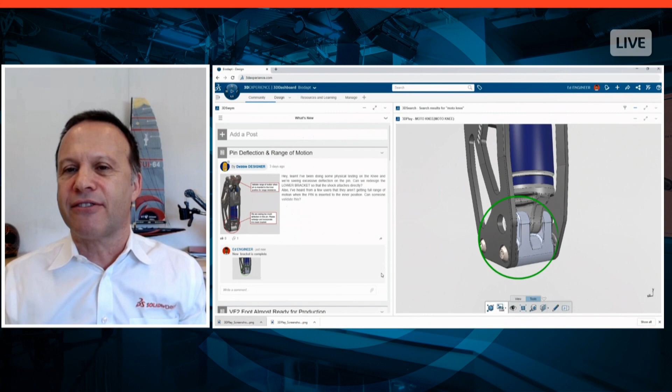In a way, this is something we all do already in various activities of our private lives when we use platforms like Amazon, Google, Facebook, Apple. We go online, we authenticate ourselves, we have a profile, we go places where you do many things, whether for convenience, shopping, or entertainment, and you do all those things in a consistent, integrated, and simple environment. You expect from this platform to find something new and interesting every day. We wanted to bring this type of experience to our users, going from simple isolated products to an entire platform type of mechanism. And we think there are very important advantages in doing so.

So let me just focus on four. We can talk a lot about that, but for instance, let's talk about embedded data management. I already mentioned this—it is included, it is embedded. Today, if you want to manage your data better, you have to use a separate product. You have to install it, you have to maintain it, you have to use specialized hardware, you need to have an administrator. Now, with our offers, all of this is gone.

With embedded data management and a central repository for all data, this helps manage complexity, organize information in a much better way, and ultimately helps you make better decisions. So this is an important advantage—the ability to make better decisions, both in business and in technology.

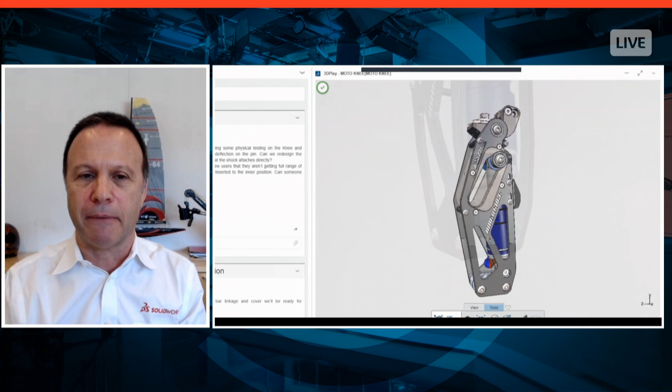Second, the collaboration tools that are part of the offers make it possible to establish and grow relationships among all the participants in a project or in various activities you do within the company or within the professional ecosystem. This will help exchange of ideas, leading to better coordination and, in the end, more innovation. So this is a huge value—it will help our customers be more innovative.

Number three: as you know, with the platform, SolidWorks assets are saved in a unique repository and everything is kept connected—you have what we call a unique source of truth. With the platform, we are able to store in any project all the relevant assets—specifications, documents, exchange of information, brainstorming, design variations. So you have a unique source of truth where everything is kept orderly.

This will make companies more agile, more flexible, and as we can see today, even more resilient to disruptions like what we see with the health crisis all over the world. Everything is in one place—you can connect and do your job from anywhere.

The last, but probably the most important part of our transformation from product to platform, is that on the platform we are able to create a lot of automation. One type of automation everybody will love is that everybody will be on the same version—we automatically update the versions of SolidWorks desktop, and we automatically update all the database, all the parts, drawings, and assemblies, automatically.

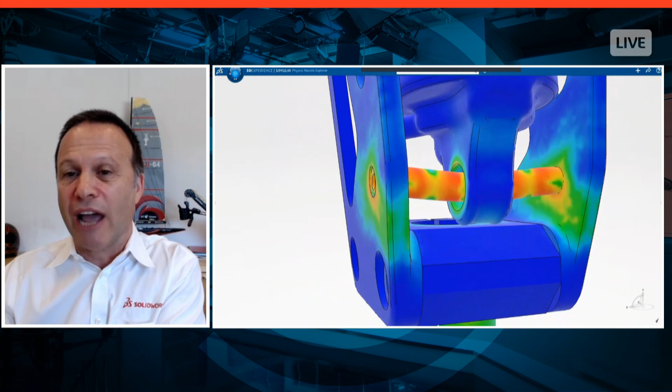Data management is one, but what about amazing simulation? Super scalable simulation, multi-physics simulation. You will find in the platform everything you need to get your job done, in bite-sized chunks, simple apps. It works just like your iPhone or your iPad. You find what you need, you get your job done, and the data model is fully consistent. You can interoperate among those amazing capabilities.

I think that's one of the really interesting things here. So today we have a new offering that comes with a set of apps. We're going to dive into that in a bit with a technical deep dive. But one of the things that's really cool here is we really open the floodgates. You were alluding to that with tools like powerful cloud-based simulation.

We're going to have access to a massive number of new apps for our customers. When we look at 3D Creator and 3D Sculptor being part of 3DEXPERIENCE SolidWorks, that's just the beginning, right? We've really opened the doors to all sorts of new capabilities for our customers.

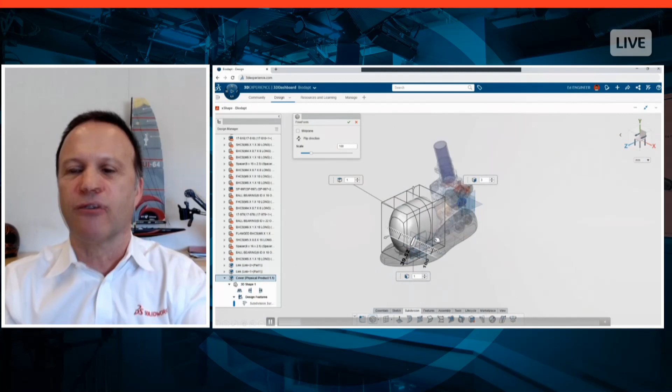Yeah, indeed. And this is part of why we are doing this, because our customers are asking for continuous delivery of innovation. Every new idea that pops up in the world, they say, 'what about me, how can I play with it?' For instance, design guidance, generative design. You're showing here the amazing capabilities of organic modeling, subdivisions. This is world-class technology, by the way, used by major OEM automotive manufacturers. From design all the way into manufacturing—CNC, MES, ERP—everything will be available on the platform progressively.

Material science, simulation of sintering processes, tools to predict better 3D printing capabilities. And the good thing is it comes in bite size, so you can explore. There are a lot of navigation tools, a lot of guidance there, a lot of examples, a lot of education, a lot of videos that explain what the various applications can do, and what adjacent applications are available, similar to what you're used to today.

You're exploring for a product and you find an indication: 'you know what, if you buy this product, maybe you're interested in this because it's a good complement.' If you're interested in this type of thing or these types of movies, here are other movies that can enhance your experience. All of this will become available on the platform. It's just like on your iPhone—you go on the App Store and explore, you put in a keyword, and you find amazing capabilities to enhance your productivity. This is exactly what we're going to do with the offers.

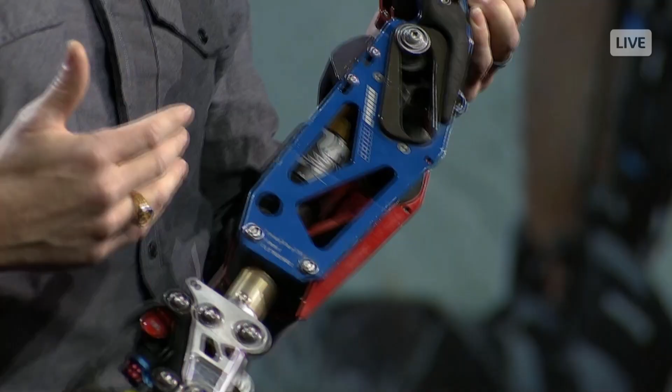There's some really good stuff for everyday equipment for walking around, like what I've got right now. The fundamental difference is, thank you, this one swings as I walk, and this one actually has spring resistance in it that helps it extend, like my quadricep muscles. This system is designed around a Fox mountain bike shock. It's got compressed air and hydraulic dampening, and it's all tunable, so I can adjust it for the snowboard, for the motocross bike, I can tune it all. What's really unique about this design compared to other sport legs is this linkage system I came up with that allows full range of motion and a lot of resistance and alignment options.

That's amazing. So this was designed by you, for you. But your dream now is to scale up and empower many more athletes with this type of device.

So Gian Paolo, tell me a little bit about your opportunity to interview Mike Schultz at 3D Experience World earlier this year. He was highlighted prominently throughout the event and has an amazing product. Tell us about your opportunity to meet and speak with Mike at 3D Experience World.

Mike is an extraordinary person. He was able, as he said himself on stage, to make an opportunity out of a tragedy. How many people are able to think that way? It was very, very inspiring. He's also the poster child for our dream to empower people to make their dreams come true. Mike was dreaming of going back into his high-level sport activities, and he took his destiny into his own hands, and technology was not an obstacle. This is exactly our dream. This is exactly why we are doing what we are doing today.

He was able to create legs not only for himself, but his prosthetics were used by more than 20 Olympic and Paralympic competitors in the 2018 Winter Olympics in South Korea. I think the most amazing part of getting to know Mike was the human part. He is an amazing human being.

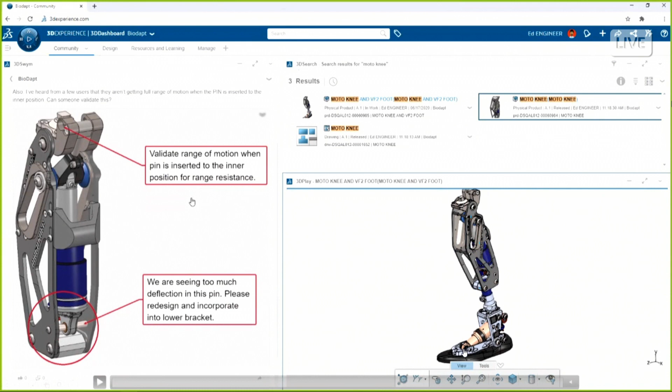So we have some commonly used files at the top and then a viewer, a 3D play viewer. Everything here is accessible on the web. One of the posts tells us, hey, we got some design work to do — get rid of the old components at the bottom and design a new part. So what we need to do is jump right into SOLIDWORKS and access these files. What we're looking at are some of the commonly used files we're working on, but we need to get these files into SOLIDWORKS. Want to see how that happens?

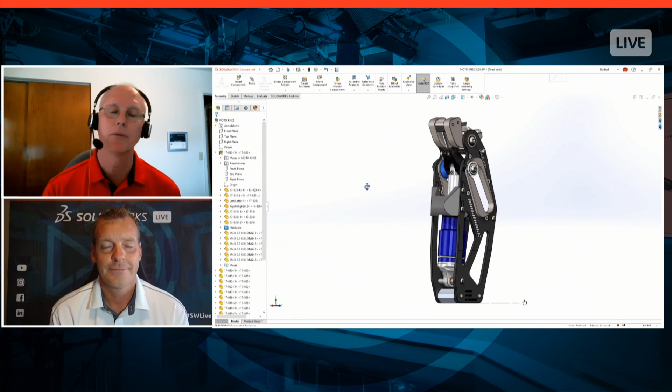I mean straightforward here, what are you going to do? Download these and open them, or what? Watch: unmaximize the web page, drag and drop right from the web page into my SOLIDWORKS window, and it opens just like from Windows Explorer. You can certainly use File Open and all those capabilities, or search for those files on the 3D Experience platform, but this is as simple as drag and drop right from the web browser — that's how connected all this stuff is.

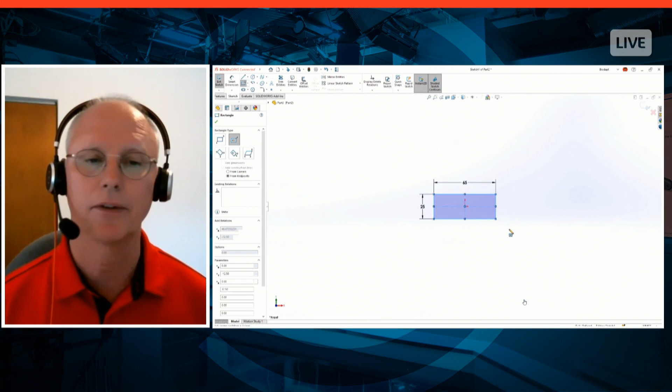Next we're going to look at the basic stuff you've probably seen over and over with SOLIDWORKS or other 3D modeling tools. Start with a sketch, add some material, go ahead and extrude it. Great capabilities — we'll extrude this about the mid-plane, add some fillets. These are things SOLIDWORKS has had forever, just capabilities we have. The hole wizard — people love the hole wizard. It's like having your machinery's handbook right inside of this tool.

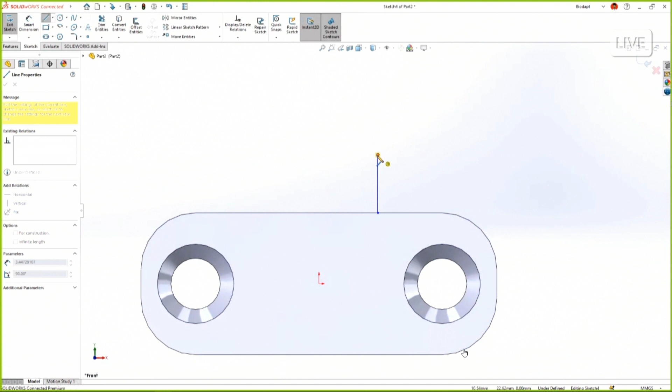Allows you to choose all your sizes, all your familiar sketching tools. Instant 3D is there. We've kind of finished our part, we're done with this part here, and pretty straightforward.

And I think that looked pretty much like the SOLIDWORKS you know and love, so right? So far it feels like SOLIDWORKS I know and love.

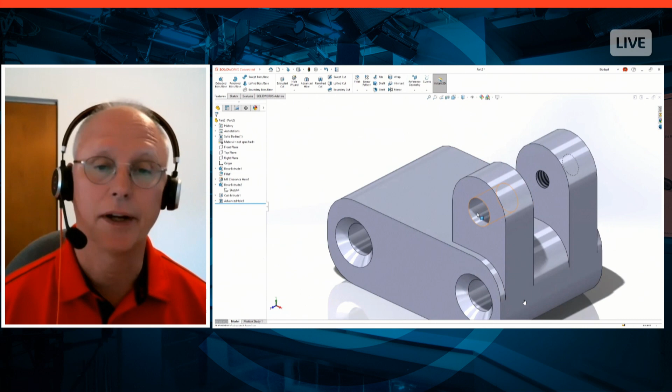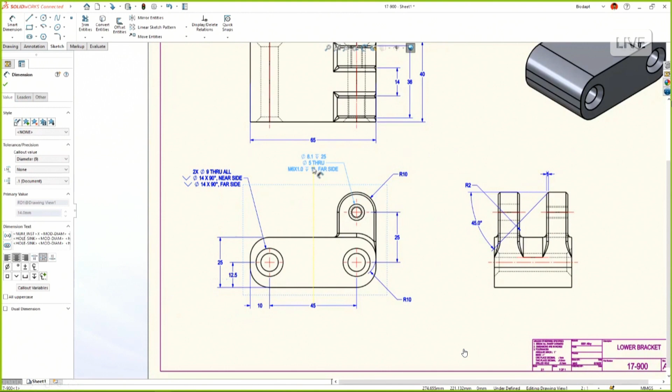Yep, next, drawings. How do we deal with drawings? Again, SOLIDWORKS you know and love here. Drag out a view, put some projected views onto your sheet, put an isometric view, shaded views, all that stuff's available. All the dimensions that were used to create your model are certainly available here, so we'll go ahead and add those. Every detailer likes to make a nice, clean, neat drawing, so moving your dimensions around is all that's capable.

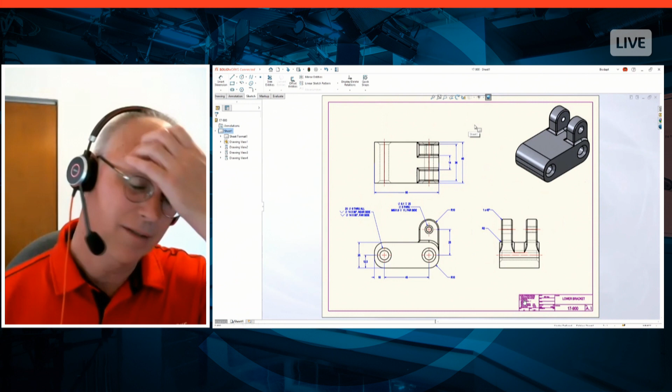So we've kind of completed our drawing here, Jeremy. Now we got some extra work to do. If you remember from the video, the moto knee and VF2 foot, you have to connect the VF2 foot to the moto knee. So we need to put a hole in the bottom or something, and try to figure out how to approach that.

Okay, so I mean, you had an old version of that had that in there. Are you going to recreate that from scratch, or can you? I mean, I feel like you've already done that work.

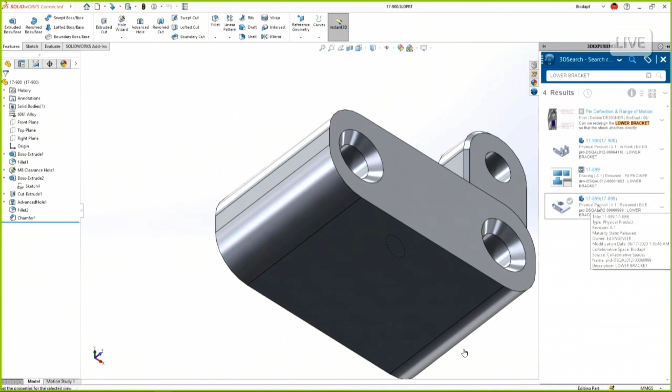You're absolutely right. So on this bottom, we want to put a hole in there. As opposed to me reinventing the wheel and trying to figure that out, let's go and do a search. So here I'm searching on the 3D Experience platform for the old lower bracket. I don't know what the number was, I don't know where it was stored, I don't know any of that information, but I do know it was called lower bracket. The search comes back and finds the model. Right from our task pane, I'm able to drag and drop and open that up, and here's these features that I want to be able to reuse.

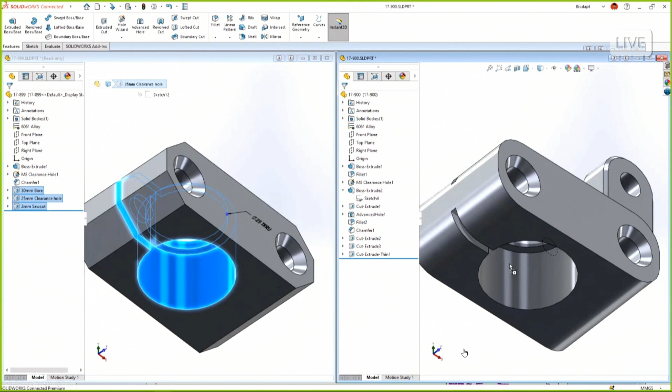Now, I could take these features and extract the dimensions or try to gather that information, or again, standard SOLIDWORKS capability and functionality, just drag and drop. Drag and drop, feature reuse, and I can go ahead and place those into my model.

We'll come back, update our drawing. Our drawing is up to date. We added a section view, inserted our model items. Now what we need to do is check this in, share this with the rest of the people on our team. It knows that the drawing's new, it knows that the part is part of the drawing and has been modified, and it's owned by me, or it's locked by me. No one else can make changes to that.

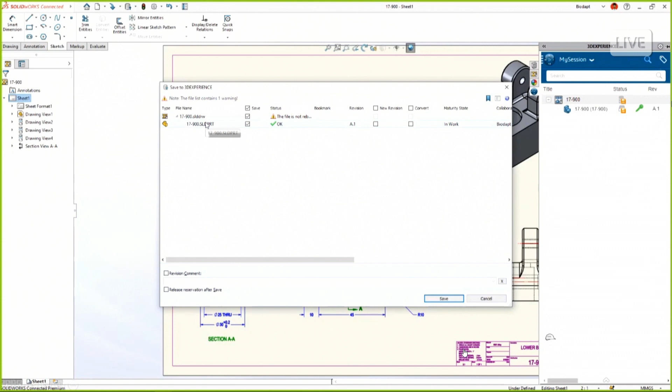So what I need to do is share this and just hit save. What this will do is actually store it into the 3D Experience platform. It knows the hierarchy. One of the great capabilities of saving to the 3D Experience platform is it's CAD aware. It knows that this part is part of the drawing, parts are part of an assembly, assemblies and sub-assemblies. It knows that full structure, and that's all taken care of.

You can see in the task pane, it tells me the status. You got a green check mark. That means it has been shared to the 3D Experience platform, and it's unlocked so that you, or Mark Peterson, or anybody else could make changes if you have access to this particular space where I've stored this.

So right now, what you showed there, where you were saving this to the 3D Experience platform, this feels familiar to me as somebody who's used SOLIDWORKS PDM in the past. Was this easy to use? Is it like PDM? Did you have to install like a server somewhere? Did you have to install local software to connect it? What did you have to do to make that work? Because the experience in SOLIDWORKS seems pretty easy, but I have to imagine you had to do a bunch of back-end work to get this to work this easily.

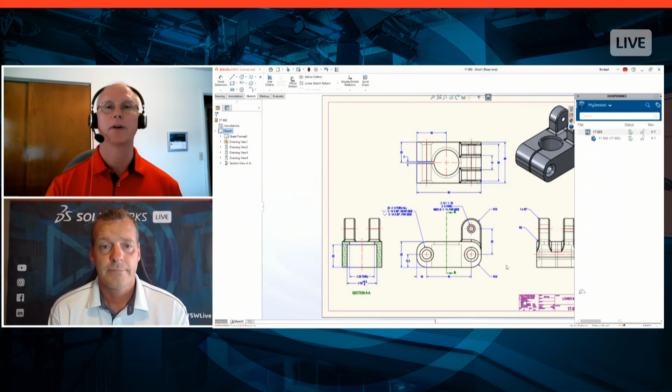No installation necessary. In fact, when I sign up to use 3D Experience SOLIDWORKS, all I need to do is access the web page. So the web page that we saw in the beginning, in the compass, there's a button there for SOLIDWORKS, and I click the button. It downloads all the software, installs all the software. There is no installation of any type for the data management that's going on here. So this data management piece is all happening in the cloud. There's no installation of any type that needs to take place. All I'm doing is hitting save, and it knows that, hey, I created, think of it as a folder, but it's a collaborative space where I can store my files.

If you look in the upper right-hand corner, it tells me I'm storing this in the Biodapt collaborative space. That's really the only thing. I can have control over that so that only certain people might have access to that particular collaborative space. I don't want to give access to everyone.

Obviously you can see that we have controls over individual files, drawings, parts, assemblies, and so on. So the same flexibility and power we're used to, without all the headaches of having to get a server set up somewhere. It just works out of the box, and it's CAD aware, so it knows that parts are part of drawings, or a child of an assembly.

All right, so you got this part done. What are we going to do next? We're going to put this thing together? Speaking of assemblies, let's do some assembly stuff.

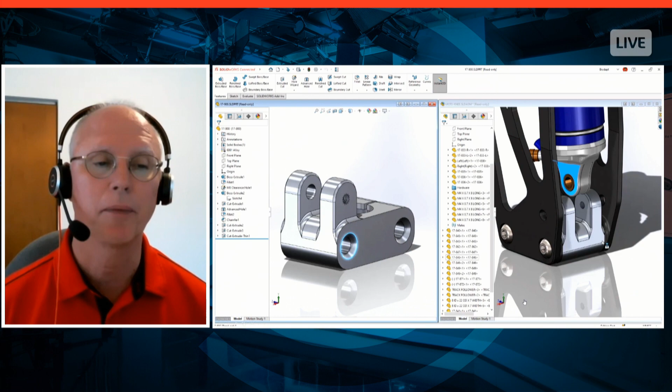So again, back to the same SolidWorks you know and love. I need to get this part into the assembly. Just using SmartMate technology, I grabbed that edge, dropped it onto the edge inside of my part, and that goes ahead and assembles it. Now we're going to need to create a shoulder, or put a shoulder screw in there.

Instead of me drawing up a new shoulder screw, I'm going to do a search for shoulder in my library. It found 12 different shoulder screws. We can narrow our search down here. In this case, I know it's going to be M8, 25 millimeters long. Comes back, I have 2 results. That one's low profile. We'll take the standard head type and assemble it right from the task pane.

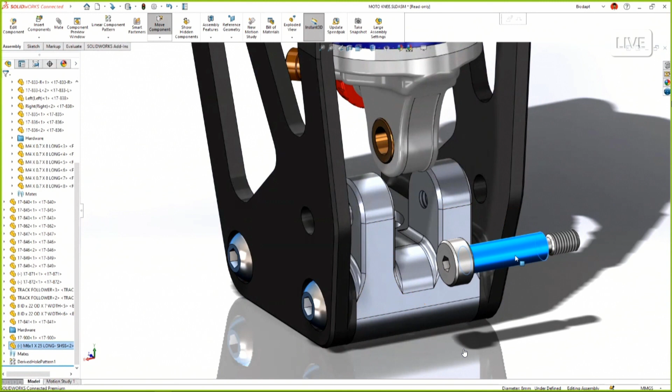Just assemble it, so that's what you're already familiar with. SmartMate technology, grab that edge, place it on there, and it adds that relationship to locate that. And finally, we'll assemble our shock, adding a concentric relationship to that. Pretty straightforward, pretty simple there.

I love how easy that was. Before you showed me you could access everything through a web browser, but what's really cool here is right from within the task pane inside of SolidWorks, it was really easy for you to search for that. Did you have to know where you downloaded that fastener or anything like that, or does it take care of everything for you?

It really takes care of everything behind the scenes. You don't need to know where that fastener goes, it does put it into a local cache, but there's no need to concern yourself. With the powerful search capability, you just do a search and it finds it, drag and drop right from the task pane. So there's no reason to say, hey, do I have access to this network drive? Did I store it on a local folder? None of that stuff. You're just accessing it from the 3D Experience platform, from the cloud, basically.

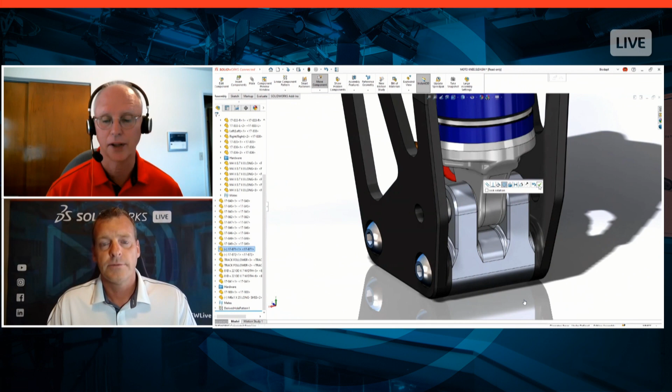All right, so what's next here? Do we know that this new bracket works and everything's going to have no issues? We know the new bracket works, but one of the other tasks we were asked to do in that post was to verify that we don't have any interference or collisions with this complicated mechanism at the top. Mike previewed this in his video with Paolo on stage.

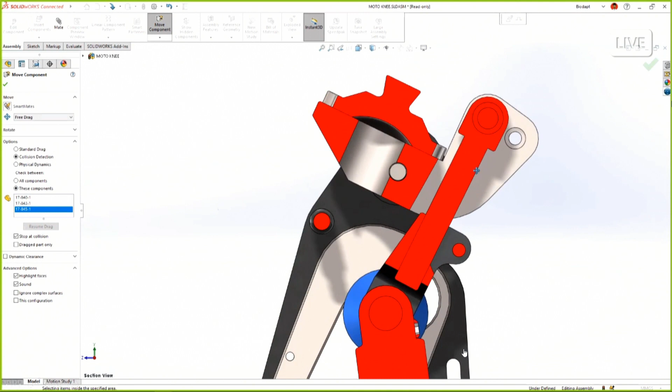So this complicated mechanism, sometimes it's very difficult to see these things when you're actually working with your assembly. One of the great capabilities is to use interference detection, or in this case, collision detection. I'm just going to do some real-time collision detection by moving some parts around on the screen, and you can see it stops at that collision. Now, I could clearly see that I had interference there when I cut the cross section, but collision detection allows you to check this on the fly.

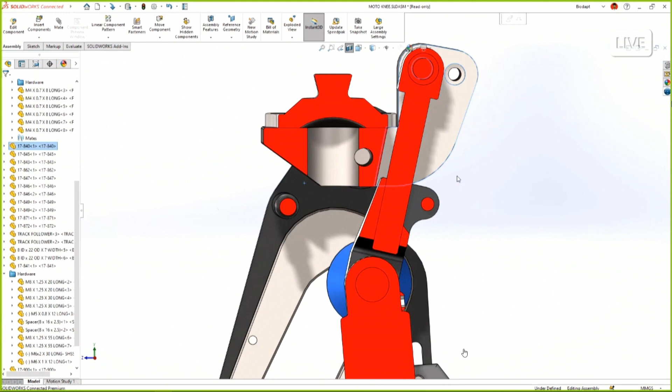We'll make a change to resolve this collision or interference here. Just change that one part there, and you can clearly see here that we no longer have our collision, no longer have interference, and now this leg, or this new moto knee, is ready to work, ready to go. It's good to go.

You made all these changes. I have to imagine we both have documentation yet to worry about, but you've actually made a change to an existing part in your design. How are we going to handle the documentation of these changes? That's very good.

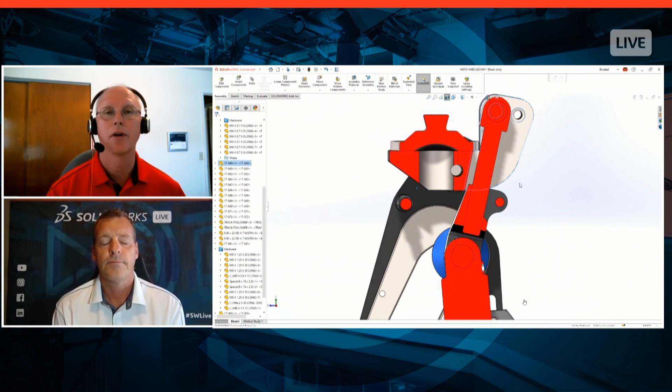When we created the lower bracket, that first part, that was a brand new part. We started from scratch, brand new part in drawing, and just checked them in. In this case, we're going to search for our drawing instead. Again, I don't need to know where that drawing exists or who's working on it, I just need to drag and drop it into my assembly. The information in the tree, notice you can see the update down at the bottom.

We'll go ahead and fix our balloons. We now have our new parts and new balloons, but the information in the tree lets me know if I have access to this part or control of it. In this case, these parts are released. We made changes to some parts, but since they're released, we can't change them directly - we can bump the revision. We want to maintain that history, where revision A has certain components at revision A. So we're able to manage that and just change the revisions of a couple of parts here.

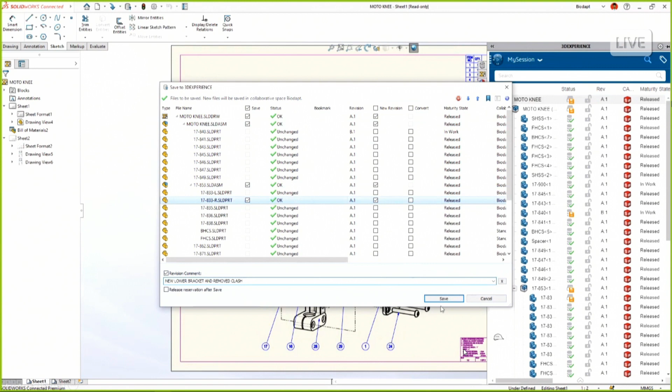We'll put in a revision comment to let people know, and basically we're sharing that up to the platform, so we now have a revision B of our assembly drawing. Our individual parts now have revision B. So we have full history control and lifecycle control, because it knows what parts are released or in work - full history, full revision, full data management, again with no extra setup work on my end.

It's just SolidWorks as you know and love. You're just storing everything to the cloud.

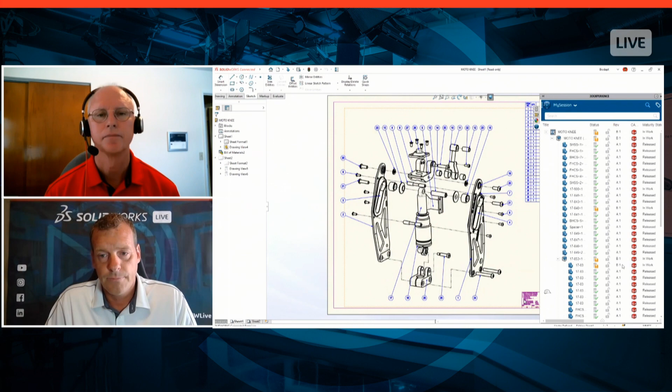Yeah, but it is a little bit more than the SolidWorks you know and love. I really love a new thing that you showed, and that was how easy it was to find my data. You had to find that fastener, find that drawing, find everything you needed. What was great was that right from the task pane inside of SolidWorks, I had basically access to everything you were showing me within the web browser on the 3DEXPERIENCE platform. Seems like SolidWorks, as we know and love, is just innately connected to the platform now.

That's correct. The great thing about it is you're connected to the platform, which is on the internet, on the web. You don't need to know which network folder, whether you're on VPN, or what local folder anything is in - you're just connected to the cloud and you have access to everything.

All right, well Mark, that's really cool, but I think we want to take this design to the next level. I want to bring Mark Peterson on to take a look at some of the other things that are part of the 3DEXPERIENCE SolidWorks offers. So Mark Schneider, thanks so much for doing that. Hang on, we're going to have a Q&A here in a little bit after we talk to Mark Peterson, so don't go away. Mark Peterson, welcome. Hey Jeremy, thanks again for having me. Yeah, so Mark Schneider showed us some really cool stuff inside of SolidWorks Desktop.

What are we going to do? How are we going to take this design to the next level? I mean, what if I don't have access to all the same resources that Mark does? Can you walk us through what that would look like?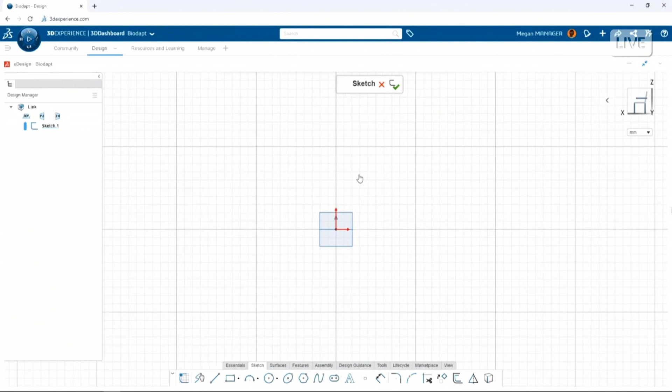So we'll start with Megan Manager - I'm going to switch real quick to a new character. She notices in the community that we need a couple of parts to finish up our project here, but maybe she's on the go and doesn't have access to her powerful computer. So what she's going to do is just open up xDesign in the browser and get started right away. Now you'll notice the user interface here looks very similar to SolidWorks and has a lot of the same icons and mechanisms.

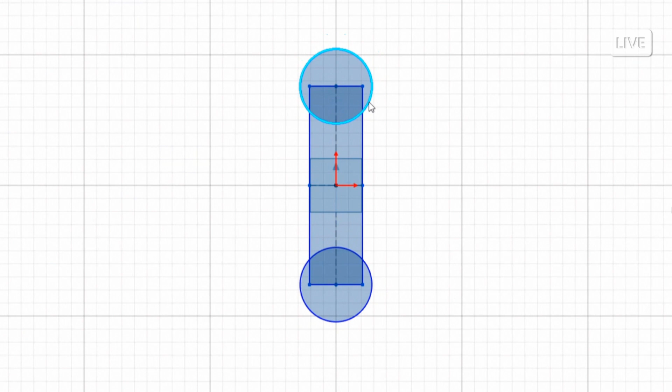So for example, pop-up toolbars for quick access to your tools. You can have context-sensitive commands there, like mirroring, for example, and some other technologies built in that SolidWorks doesn't have. So clicking on an entity brings up a dimension that you can click and specify the size. This is some really great stuff.

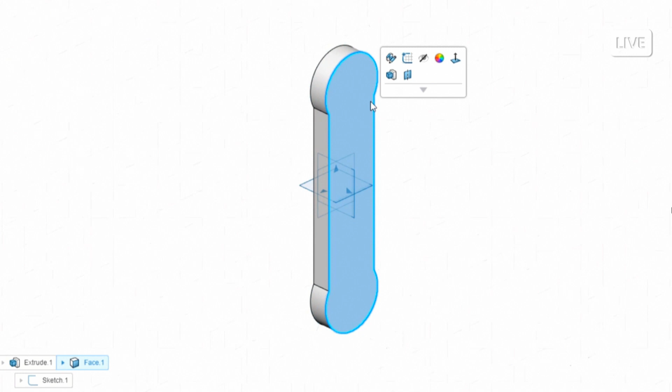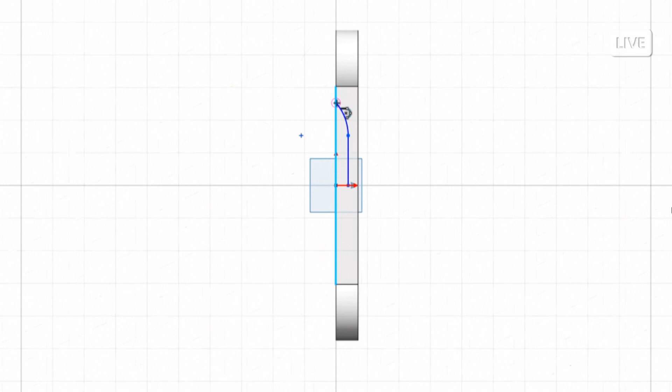Mirroring works the same in features as it does in sketches. Again, just a lot of the same shortcuts and mechanisms that you're used to, as well as things like picking up silhouette edges from 3D geometry and pulling those into your sketches, or quickly accessing a trim tool to get rid of entities that you don't need. And just like that, we've created a quick part that we want to use in our design, for example.

Yeah, so these tools are great. I love the fact that you're able to do all of this within a web browser. X-Design is really cool. Everything about 3D Creator is really cool.

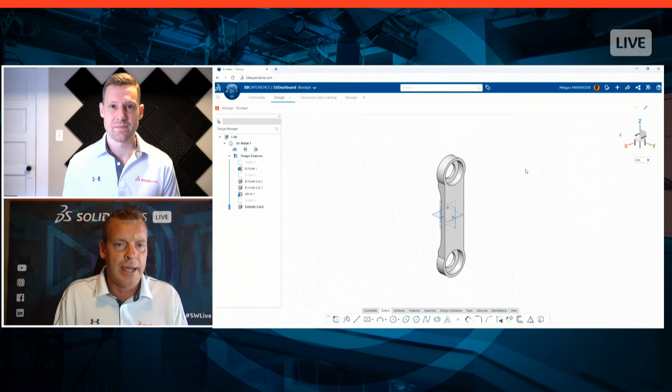But the question that comes to mind is, you're playing the role here of this character, Megan, who doesn't have access to SolidWorks. Well, part of the design, don't we want to put this back in that SolidWorks assembly? So she can't do it. So how are we going to tackle that?

Yeah, exactly. Without 3DEXPERIENCE SolidWorks, she needs to go back to the office to get access to her computer that has SolidWorks installed on it. But maybe she can't do that - maybe she's traveling or something like that. So instead, she wants to inform another team member. In this case, we're going to inform Eric Engineer that there's some extra work that needs to be done, and we want to pull this 3DEXPERIENCE file right into the SolidWorks assembly of the VF2 foot. Traditionally, you would do that using email, but here what we're going to show is that you can do all of this communication using the 3DEXPERIENCE platform.

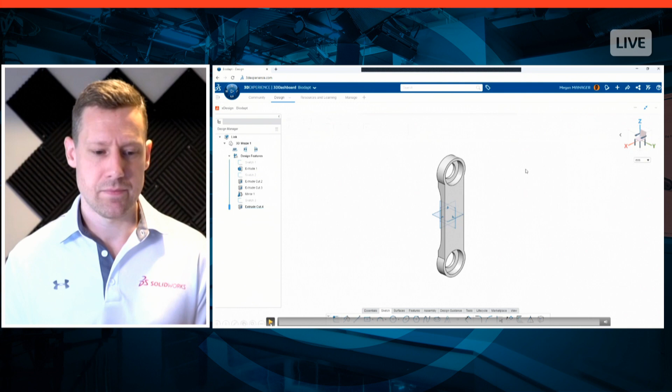So let's play that. There we go. So what she's going to do is just expose her collaborative tasks app and get started right away by creating a new task. Usually with tasks, you just create a title, but it's a lot more than that - it's very rich in its context here.

So of course you would add a description, something that helps Eric understand the job that needs to be done. And then there are other entries that you can put here - for example, any kind of files that might be contextual. So here I have a PDF file, but it could be a spreadsheet or something like that. We could also estimate a duration or finish date so we can keep our lead times low on our projects, which is really important to the manager. And then, of course, we assign Eric, and he's going to be notified that he's been assigned here.

My favorite part of the collaborative tasks is the ability to attach this CAD data. Instead of asking Eric to go and search for the right data, which might take him time, Megan Manager can just add the data here inside the attachment. That really saves a lot of time, and also saves the uncertainty that Eric might have about whether or not he's working on the right files.

While she's here, she's going to create another task to ask Eric to create a visually appealing cover for the VF2 foot as well. Again, just filling out this form as she did before, adding those attachments to make sure that he has quick and easy access to those.

So it sounds like Megan's given Eric a lot of work to do, and I think we're going to take a look at that in a minute. But one of the things I really like that you showed is she took a lot of the heavy lifting off it - she knew what he was going to have to work with. I really liked that ability to attach the component that she just made there in X-Design. Because the SolidWorks assembly is already on the 3DEXPERIENCE platform, she was able to search for that and add that as well. She kind of took any confusion or guesswork out of what Eric's going to have to do, right?

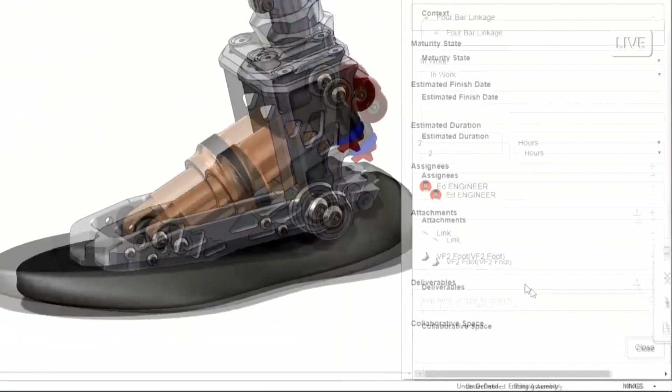Now we're going to focus on Eric Engineer and his session. He could go to the collaborative task in the web, but he's going to do it right here inside his SolidWorks user interface. So all he needs to do to get started on a task is drag and drop it to In Work. This notifies his manager that he's gotten started, and he heads straight to those attachments and opens up this data straight from the 3DEXPERIENCE platform right into a session.

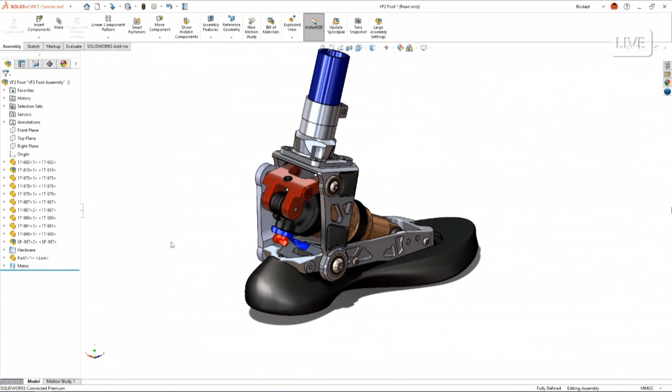Pulls all that data down for him immediately, as well as opening up that 3DEXPERIENCE file link. Notice how that just opens up just like any other SolidWorks file. We can pan these over, drag and drop this, and it snaps right into our SolidWorks assembly. This is a first-class citizen here inside SolidWorks, so we can perform other operations. For example, we want to mirror this over to the other side, and we can do that just as simply as using our SolidWorks commands. Of course, these are real physical files, and we can see the motion of the assembly here with those files included.

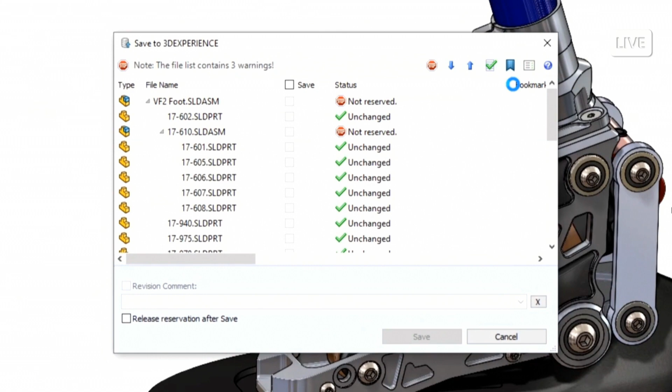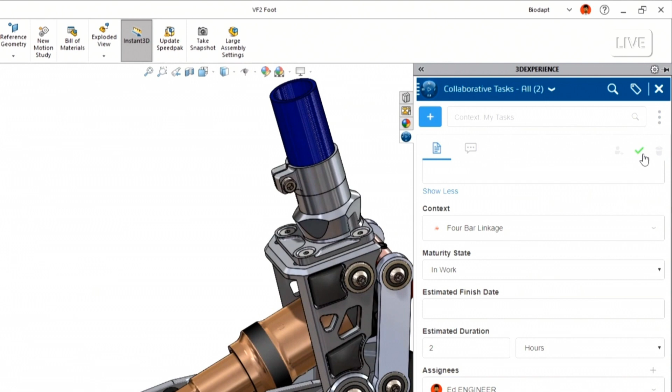We want to make sure we save this back to the 3DEXPERIENCE platform, but there's a stopgap check here to make sure you have access to write to the platform and save your changes. This could be really important because it's possible somebody else might have been working on these files, and this makes sure you don't accidentally overwrite anybody else's work. So that just saves the differences to the 3DEXPERIENCE platform, saving you time and bandwidth. Then the last step is that Eric wants to notify his manager that he's completed the task, so he'll just confirm that in his task pane.

You showed a lot of really cool stuff there. I think what's really interesting is we saw Megan working in the web browser, and like what Mark Schneider showed us earlier, you were able to do all this right within SolidWorks. That task showed up, you got a notification for it, and you were able to access the files from there, so it was pretty easy to go ahead and do that work.

One of the other things that really stood out to me is when you had to check those files back in, you hadn't preemptively reserved them. You were able to just do that whenever you wanted, as long as nobody else owned them. Is that what I saw?

Exactly. I've had a lot of experience working with solutions like this, and sometimes what happens is you make a bunch of changes, you're really happy with them, and then you forgot to check out or reserve those files. Now you have to back out of all that work and do it the right way from the beginning. So the flexibility to reserve those files on the fly is really powerful, and it saves you from a lot of headaches, which is just really a pleasure to work with.

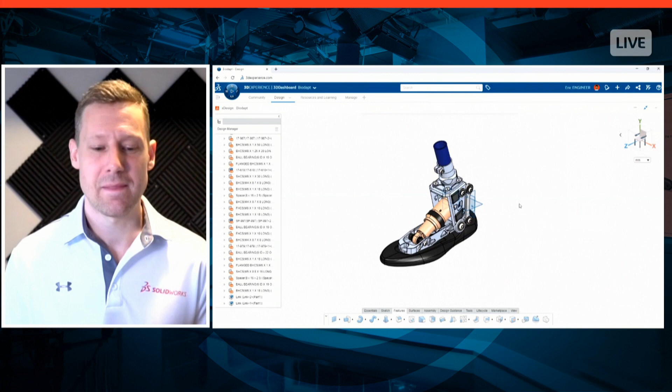So the other thing I saw that I found really interesting is you brought a file that you created in xDesign into SolidWorks. What if I wanted to go the other way? Can I use a SolidWorks assembly inside one of these X apps?

Yeah, absolutely. So for the second task that Eric has to do, he wants to create a visually appealing cover for the VF2 foot assembly. He could do that in SolidWorks using traditional sketches, planes, and surfacing, and that would be fine, but with 3DEXPERIENCE SolidWorks, he has access to a subdivision modeling app on the platform.

So all he wants to do here is open up that assembly inside the 3DEXPERIENCE platform. As you can see, it's a mix of SolidWorks files and 3DEXPERIENCE files. Eric is just going to add another 3DEXPERIENCE file, and of course we just want to give it a name — we'll call it cover in this case. If we want to edit that, we just double click to activate it. Now you'll notice that the SolidWorks assembly goes translucent, indicating that we're now going to be working on this new file.

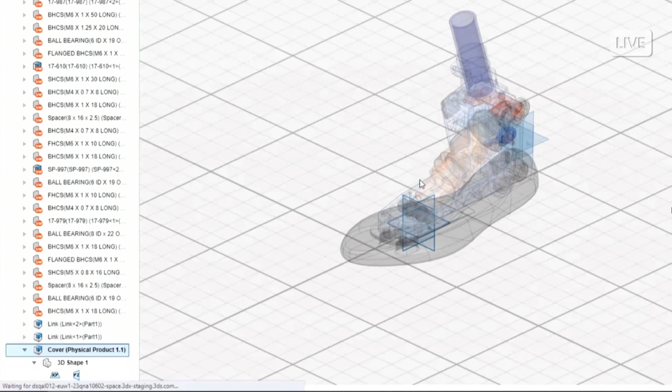So we still have access to reference that SolidWorks assembly, and we're going to use these primitives now. Notice these are just basic starting shapes for our design. We can add or remove subdivisions as needed, and then push and pull on that, kind of like virtual clay, if you will.

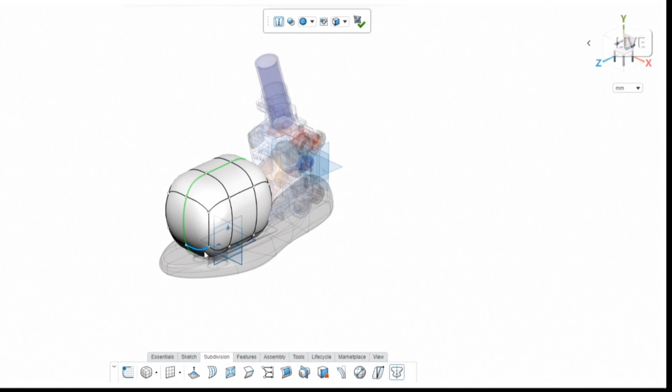Now that we have it sort of in the right spot, we can add some symmetry that's really useful in a lot of designs like this. And we have a lot of these curved, soft edges. Let's go ahead and harden those edges with a crease. Notice that context-sensitive pop-up there again, just saving me time searching for commands or looking in a toolbar. It's right there next to my cursor. I can manipulate this object.

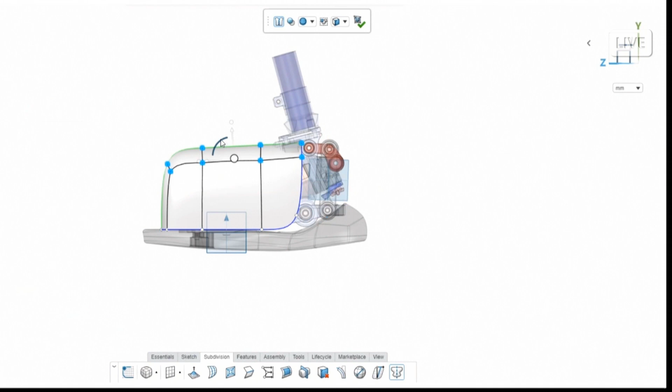Maybe Eric wants to make this a little bit more visually appealing by changing that top surface. Instead of just moving it, we can sketch directly on that primitive and create something really interesting looking. So we're going to continue manipulating these areas until we get to the shape we're looking for.

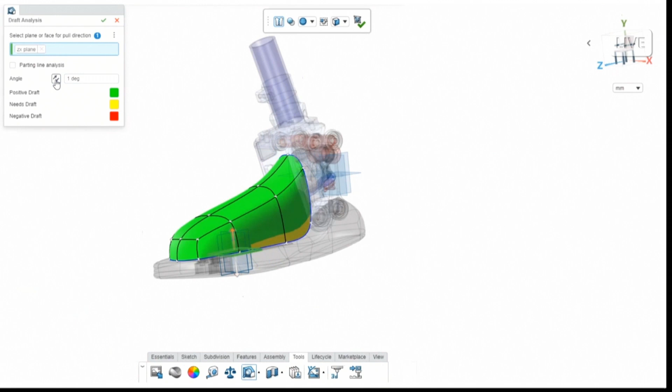And we expect that this part will likely be injection molded, so we want to do a quick draft analysis. Of course, any yellow or red here indicates a potential undercut. So we'll just manipulate the subdivision model until we get all green in this case.

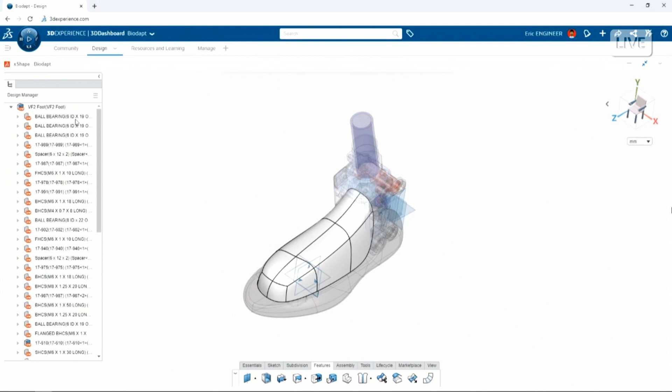And then finally, we want to perform some other operations. We can totally do that. Here we have the ability to create a shell, and we can do that just like we would in any other CAD environment.

Mark, all that stuff's really cool. I have a bunch of questions I want to ask you as we go through there. So one of the things I noticed is it didn't look like you had to add any sketches, any relationships, any mates, anything like that. Is it really that easy? Do I just push and pull on this stuff?

It really is that easy, and it's such a pleasure to use. It's so much fun, really. And the thing is, you're trying to create something that's very creative. It's not necessarily parametric until you get later on down the road. You want to be able to express your idea as freely as possible, and that's what this tool allows you to do. Doing it with sketches and planes and surfaces, that's fine, but sometimes you get bogged down in the details—it's a little bit cumbersome. But with xShape here that we're showing, it really just gets out of your way, and you can just design what you want to design.

So if I want to go further, one of the things I saw you do at the beginning is you were in xDesign, and it seemed like you just quickly switched over to xShape. Can I go back to xDesign and add like ribs and holes and things like that?

Yeah, absolutely. You can switch that right back to xDesign, or other apps that you have access to on the 3D Experience platform. And the great thing about it is you don't have to close it out or save it to a different format. You can just use the switcher inside the app to go directly to that. So you don't have to redo your setup, you don't have to start from scratch or anything like that. It just picks up where you left off and changes it in the background.

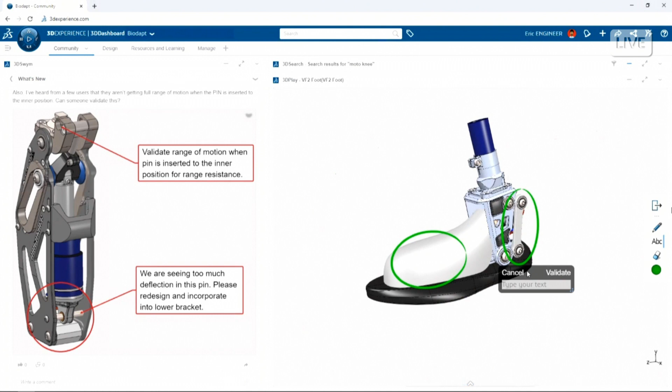So what Eric is going to do is open this up inside the 3D Play app here. We can see he can manipulate this, hide or show items, do an exploded view, which was not created in SolidWorks, it was done inside the 3D Experience platform automatically. But we really want to highlight the new components that we created, maybe add some text in there, and then take a quick screenshot of that, built into the 3D Play app.

Now we're going to head back over here to our 3DSwym community and just reply to that original post and ask the rest of the team, what do you guys think about these new parts? Then they can keep replying in this thread, and we can keep everything organized and get a bunch of feedback from everyone to continue on with our design.

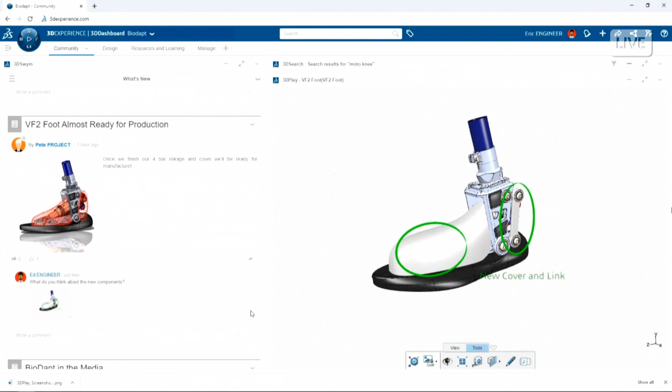Very cool. So one of the things we wanted to give everybody is a fairly high level overview of what you're getting with 3D Experience SolidWorks and the new offers that we have. One of the really cool things here, we show this in another video.

So if you go to that website, I'll link it again later, solidworks.com/offers, and kind of dig into the demo gallery we have, the demo library we have there, one of the things you could have done with this is make multiple versions of this and turn it into an idea and have people vote on it.

Can you quickly explain that, like what an idea funnel would allow you to do here? Yeah, this is exactly that.

Now, this is secure access to your platform. So your company has logins and users that can access this, but it doesn't just have to be team members. You can invite anyone you want and specify what they're able to see or participate in. So yes, of course, you could create an idea and have your team vote on it, but you can also get other stakeholders from outside your company to vote on it. For example, maybe you have some champions for your products and you want to invite them to an early visibility of an upcoming product. So there's a lot of flexibility in the platform.

And one of the most important things is that it's super, super secure. So you don't have to worry about your data being leaked out or anything like that. It's all contained within the platform securely.